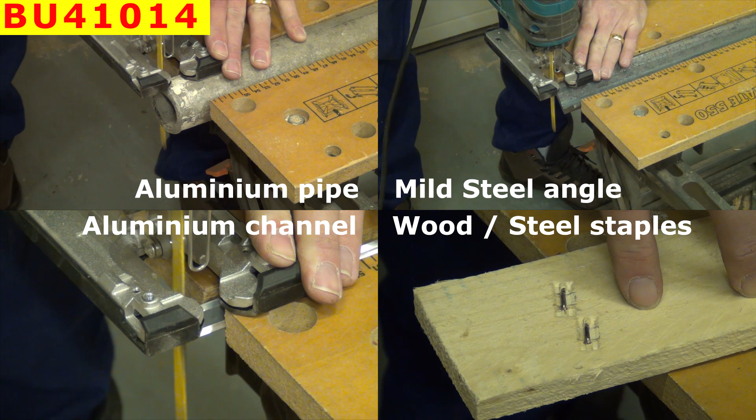The BU41014 is a multi-use blade. It coped very well with cutting aluminium pipe and channel, mild steel angle and wood with staples in it. In all the test pieces the cuts remained nice and plumb, and the finish that resulted was actually pretty good on all of those surfaces.

BU224 is a dedicated metal cutting blade, and I was very impressed with how well it cut everything I threw at it, especially the chrome steel bar.

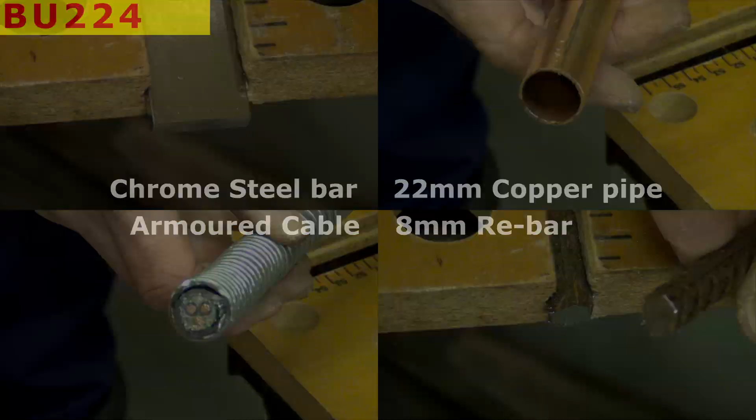BU38 is a wood blade which with the pendulum on cuts really fast, but obviously gives some tear out. With the pendulum off it produces quite a good cut with very little tear out, but obviously a bit slower. It's also quite capable of cutting curved cuts as long as the curves aren't too tight.

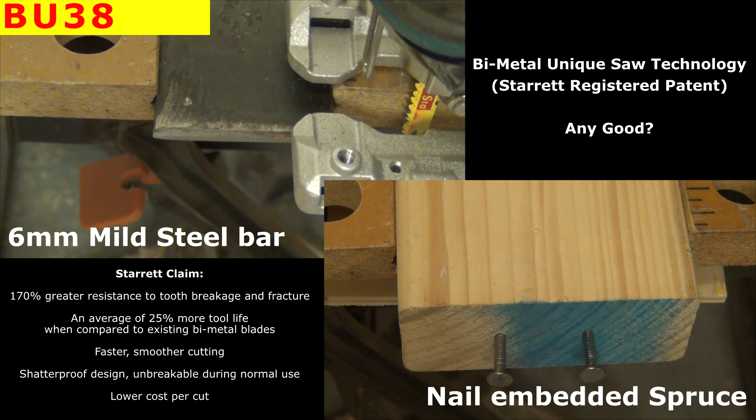Starrett have their own patented unique bimetal design which is supposed to resist tooth breakage, so I tested that out on some nail embedded wood and also on a piece of 6mm mild steel. These are places where I would expect a wood blade to lose a few teeth.

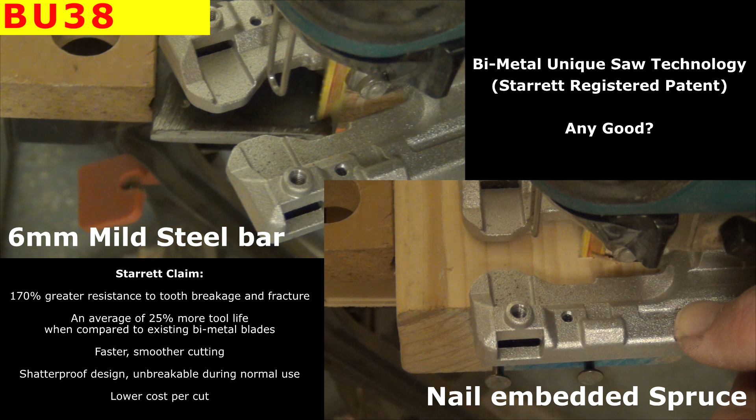Now of course this is just a test, and I'm in no way suggesting you use these work practices yourself.

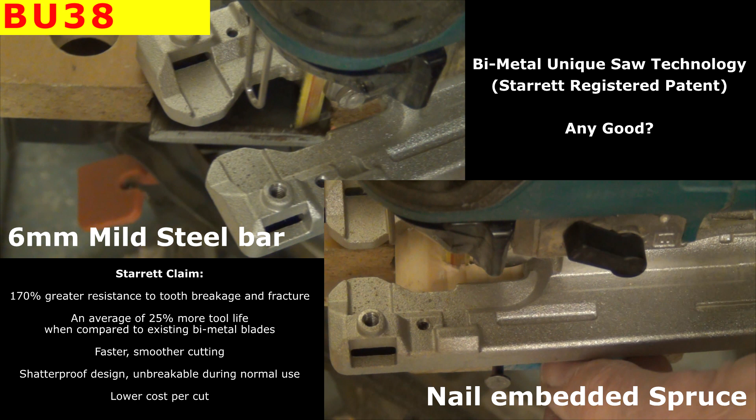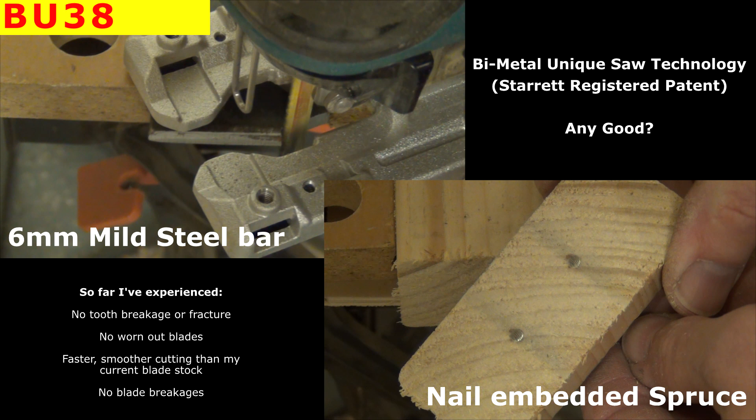So just how did things turn out? Well, handling of the machine was very easy, and the cut was good. Both cuts were good. And if we look at the teeth, well, there's no sign of any damage to any of the teeth at all.

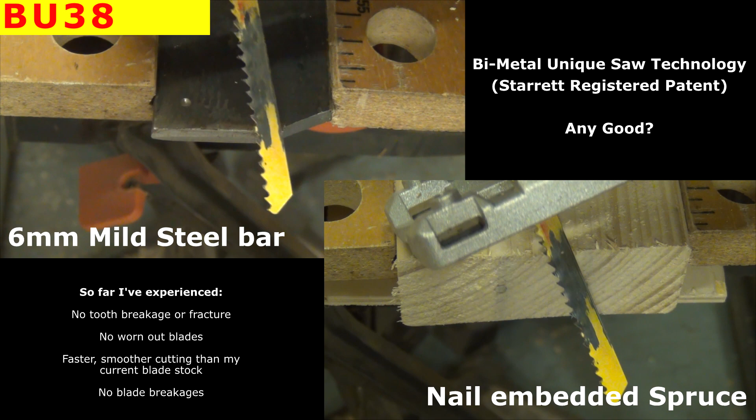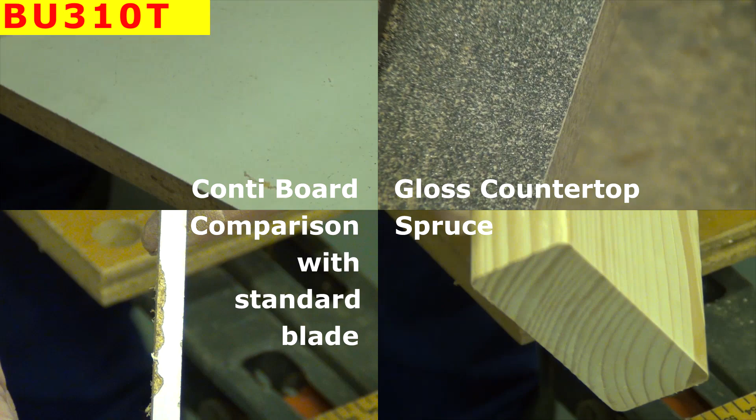The BU3DC has the dual cut tooth profile that you can see here, and produces lovely tear-free cuts in MDF, with oak veneer, and in Conti board and solid timbers.

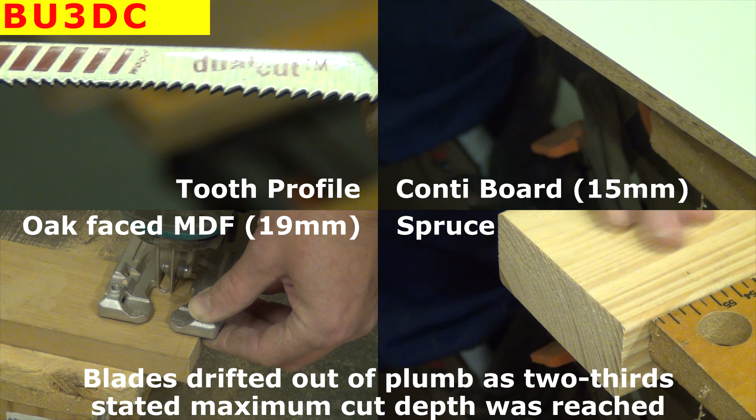But I found that once we got to about two-thirds the maximum depth of cut that's stated for them, the blades started to drift.

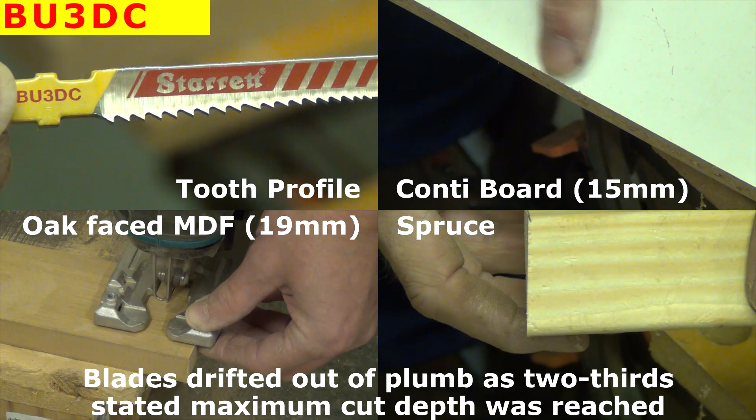The BU2DCS blades proved excellent for scroll work, the dual cut tooth profile leaving an excellent finish on both surfaces.

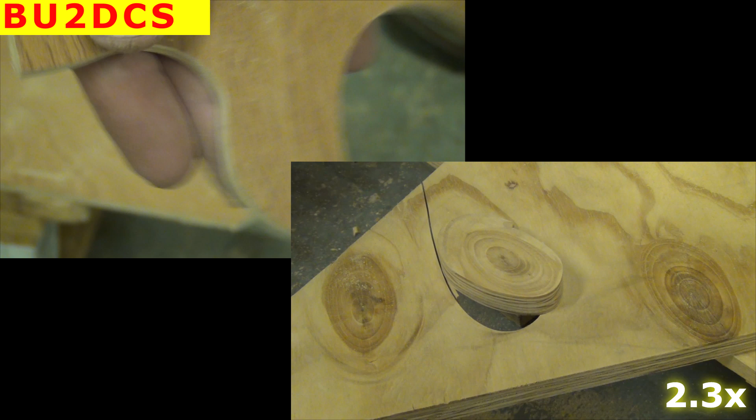So what can I say to wrap up the review? Well, I'm actually very impressed with the Starrett blades. I think in most respects they're the best jigsaw blades I've used so far. I'm used to using Black & Decker and Makita blades, and I would say that these are better than those. Got some really good finishes off some of the blades with the pendulum off, and some really fast cutting with the pendulum on. Excellent job. Nice to see that you're producing a blade which lives up really to your excellent name for measuring equipment.